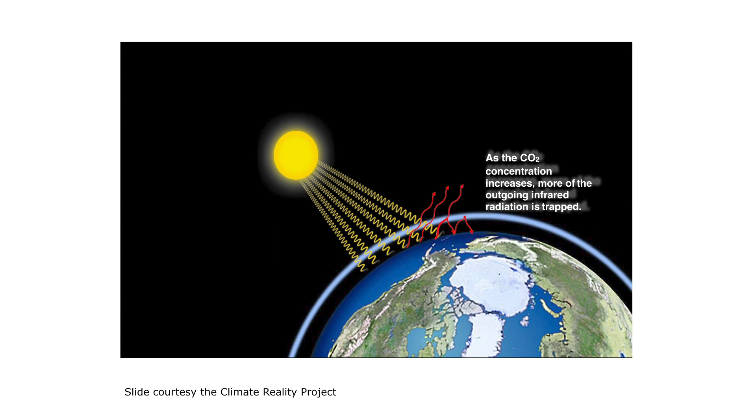I'm just going to show you some really scary math to start with. We all know that we have to reduce greenhouse gas emissions by about 90% in the next 30 years. And just to put this in perspective, that is to keep ourselves below 1.5 degrees of warming. That's a

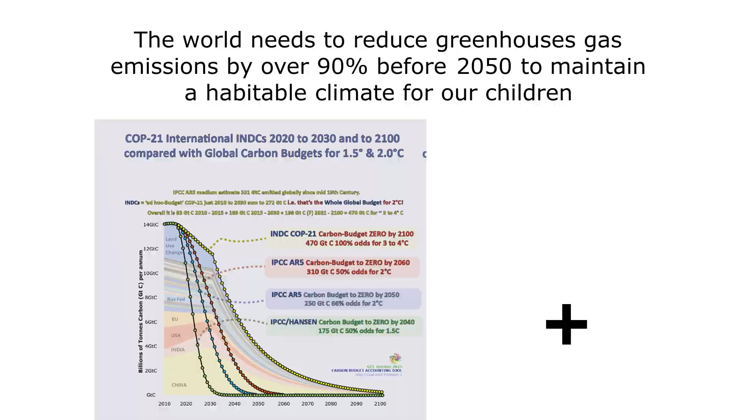really crazy target. I'm on the City of Edmonton Energy Transition Advisory Committee, and Edmonton will have blown through its carbon budget to stay within 1.5 degrees at the rate we're going in 8 years. If we implement the conservation measures that we have been planning, we can stretch that out to 10. So it's a pretty scary prospect.

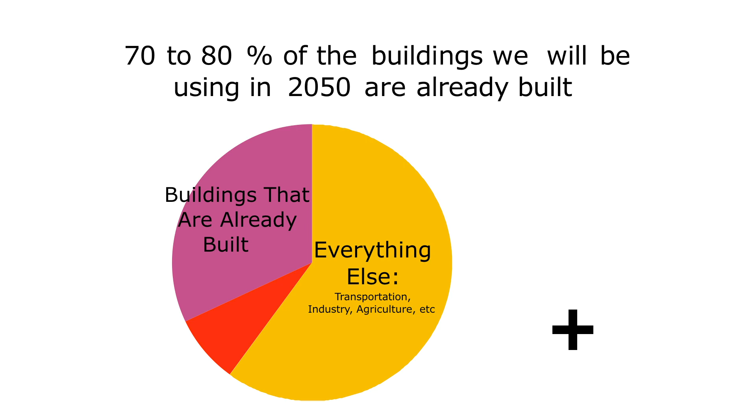So buildings are responsible for about 40% of those greenhouse gas emissions. Today, 70 to 80% of the buildings that we'll be using in 2050 are already built. That's totally scary. That means if we don't deal with existing buildings, we're pretty much hooped. We are not passing a livable planet on to our kids, and we haven't even started to do this. So it's a grim and really unavoidable fact at this point.

So the Dutch have got a little bit of good news. The Dutch have been thinking about this for longer than we have, and they've developed a pretty cool system. They start with existing buildings. They do a digital scan of it. They build panels in a factory off-site. They're on site for a few weeks, and they've turned these buildings into essentially net zero energy buildings. Zero on the meter, they call it.

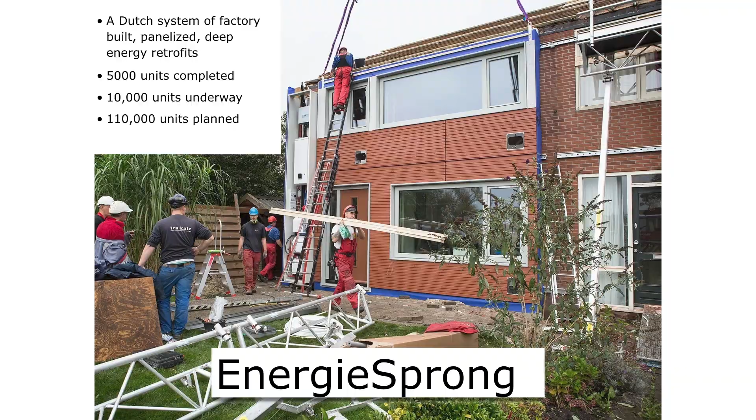The roof panels that come in have racking for solar panels. When they're gone, the companies that are doing this leave with a guarantee that the utility bills for that building will be zero, basically for the foreseeable future. And so they've done about 5,000 units, and they've got another 10,000 underway. Their pilot project is 110,000 units, and then they're planning on millions. So it's really inspiring and hopeful.

There are huge advantages of these panelized deep energy retrofits, especially doing it all at once. It's cheaper in the long run than doing a little bit at a time type renovations. Quite often, if you replace your siding and add 1.5 inches of insulation and don't make the building airtight, don't change your windows at the same time, and really you should have added 3, you're doing work that would need to be redone to get that building to a carbon neutral ready standard at some point. So it really makes sense to do this all in one shot.

It's way less disruptive on the site. You don't have tradesmen coming up 1,000,000 times doing little bits of stuff here and there. You have one big disruption and you're done. And it's cheaper in the long run. So we have gotten funding from Natural Resources Canada to do this to a 59-unit townhouse complex. They're paying part of the cost, and the co-op whose housing it is are paying the rest.

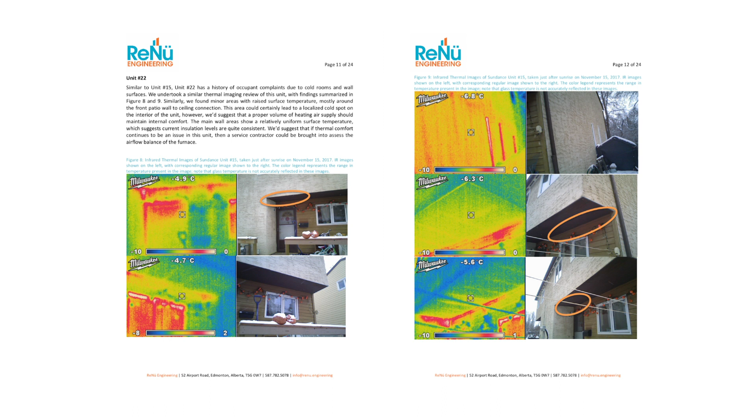And so they hired Stuart, who you just heard from ReNü Engineering, to formalize and professionalize the work that the students had done. And I helped him with the building condition assessment, and he did similar modeling and came up with scenarios that would come to a sort of carbon neutral ready. And he got Dave Butterwick, who is one of the partners in Butterwick Construction, and now Stuart and my partner in Butterwick Projects, to do the costing on it.

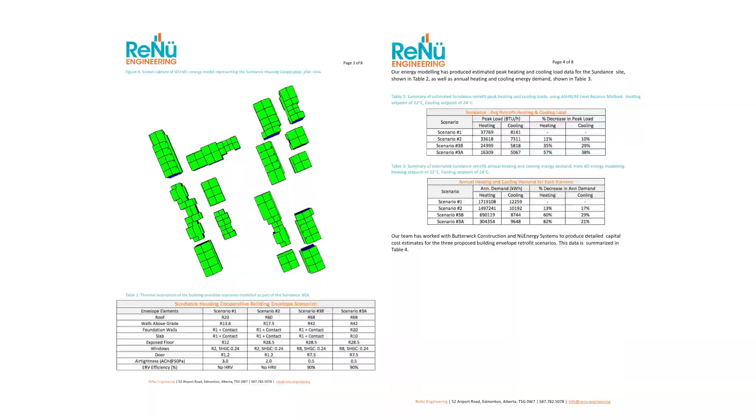And then not much happened with that until we got this opportunity for the R&D funding with NRCan, and we gave NRCan this proposal, and we're really taking the Energiesprong approach and applying it to a fairly difficult site where we're going to have to solve all kinds of problems that they don't really have in most of the multifamily sites in Holland.

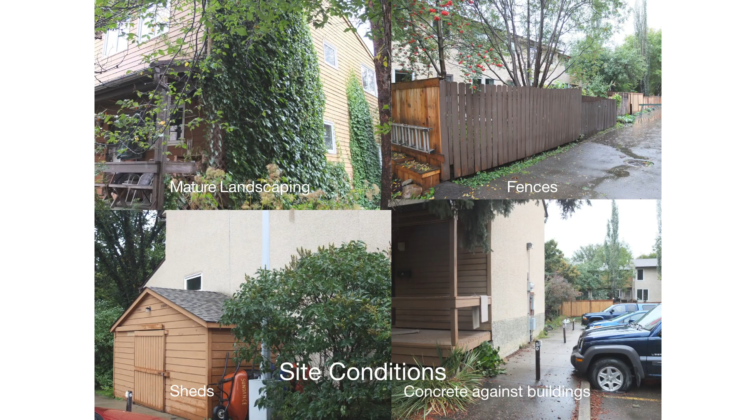We've got all kinds of landscaping. We have to watch out for... we're doing this while people are living there, and some of the yards are very nicely done, and somebody's grandmother's petunias are in the way of our panels, and these are all serious matters. We've got fences, we've got sheds in the way, we've got places where concrete is right up against the building, we've got some really tight geometry in some places, cantilevers.

And in fact, when I showed the little jog thing to a fellow who gave me a tour in Holland of a couple of Energiesprong installations, he said, "Oh, that would be a no-go." So we've got a real challenge here.

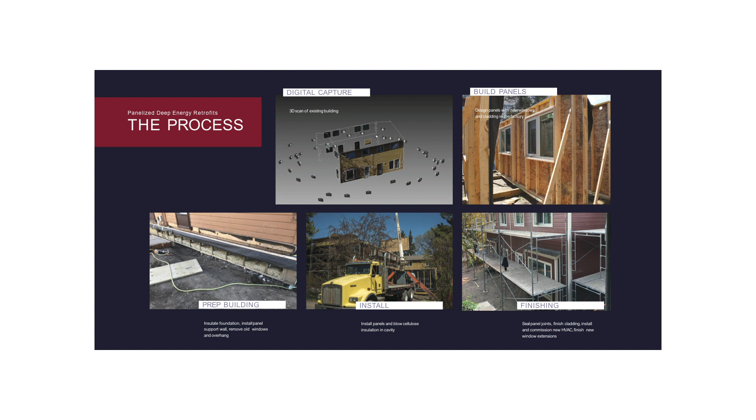So basically, our proposal to NRCan was that we would start with a pilot phase where we retrofitted the first duplex and develop systems and analyze the mistakes and the learnings from that, and use that to refine the costing before we tackle the other 57 units. So we've done that now, and we're in the phase right now where we're working on our costing on the other 57 units, and mulling over the lessons we've learned and costing out the changes that we're proposing to make.

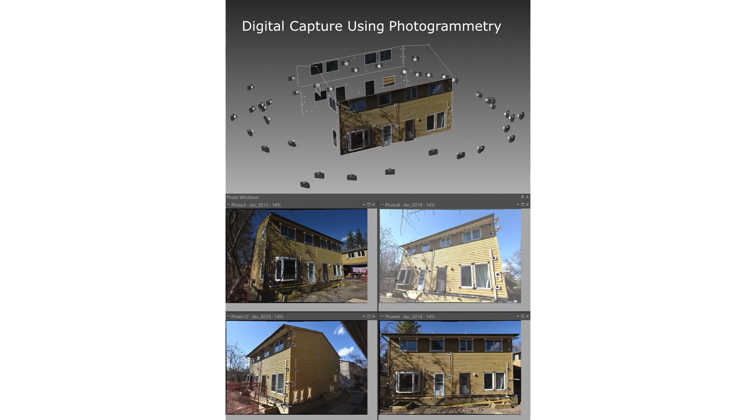So in a nutshell, the process is that, and we didn't do this in the pilot, we actually used a tape measure and measured the building because we're struggling with the digital capture still, but you use a digital capture that turns into panel drawings, build the panels, prepare the building, swing them in place, and then finish it off. And I think I talked about some of these advantages here. I just kind of like this cool banner that we had made, so I'll skip over that so I don't run out of time. But the digital capture is quite interesting, and it's a critical component of the process.

You can't really rely on tape measurements because of the likelihood of error. If you've got a crew of 5 or 6 people and a crane and panels that have siding on them, and you run into a window that's 2 inches off, or you forgot about a vent that you need, something doesn't fit, you're stopped in your tracks, and any of the advantages of panelization kind of go out the window.

So we're still working on this. We're working with photogrammetry, and we're also trying LiDAR, and we're making headway on both of those. That's part of what we're doing right now in the interim. We've got to get that going, essentially before the fall.

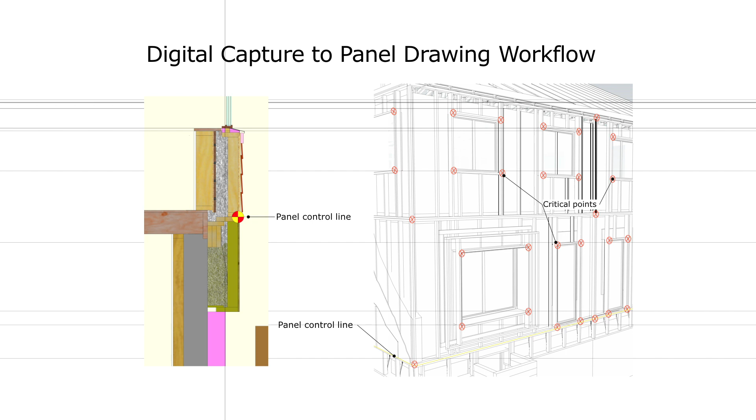And then once you have the digital image of the building, it's typically a point cloud. You need to then take dimensions off that point cloud that can turn into a reasonably accurate measurement of the existing building, not necessarily level, square, or plumb. The windows didn't necessarily get put where the plan was exactly. So you need to really have a very precise workflow that takes the digital capture into a CAD drawing for the panels.

So in this case, we actually built the panels on site using tape measurements, and learned that we can't ever do this again. We didn't have enough room to work, and we made a mess of the site. We spent all kinds of money restoring the landscaping. But it actually worked, and the details on the panels actually worked fairly well as well.

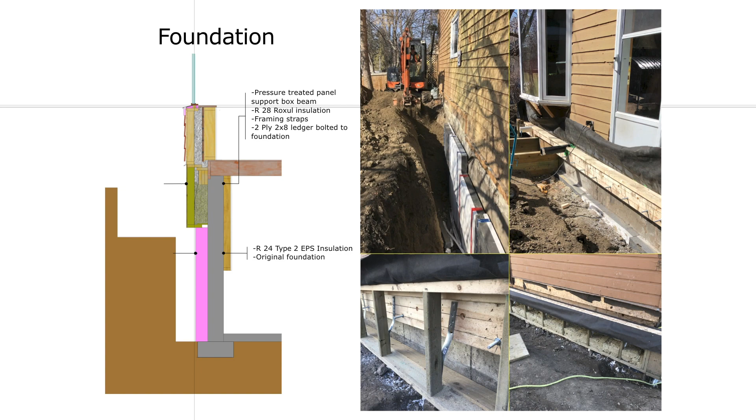So we're building a second 2x4 wall that sits on a support beam that we attach to the building, and then we blow that cavity. It's about 8 inches full of cellulose, and we use an exterior vapor open airtight membrane that gets sealed together behind the siding, essentially.

So at the foundation, and this is one of the sad lessons that we learned, we dug down to the footing with a backhoe just as the frost was coming out of the ground, and really made a mess.

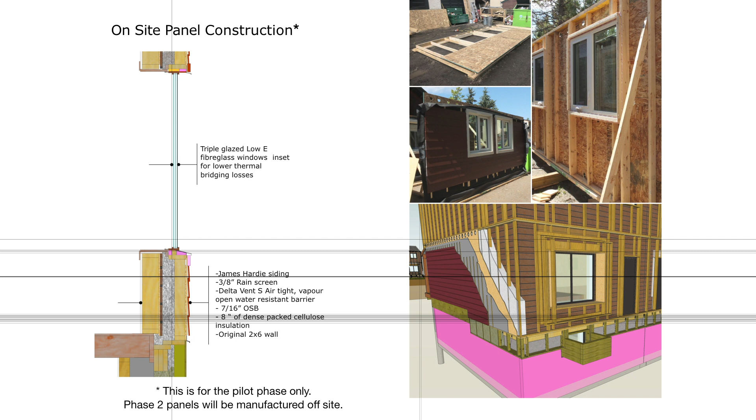We had more dirt than you can imagine piled in somebody's yard, and then some. And so we're now pricing the option of using a hydrovac truck to suck a trench of about 8 inches, and then we can drop a 5-inch panel of carbon impregnated or graphite impregnated EPS insulation. We're pretty confident that ultimately that will be a less expensive version,

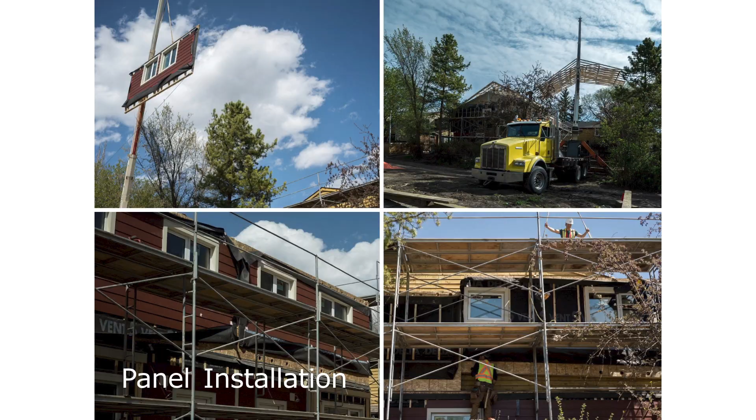and that's one of the things that we're working through at the moment. So then we had a big exciting day when we swung the panels in place; we've actually got some nice video of this as well. We did this in 2 lifts. We did the lower level, then filled that with cellulose, and then did the second level after that. And we didn't have any room for the panels, so we ended up having to actually do that lower level first because we had no place to build any more panels by then. Then we did the second panels.

In the lower panels we didn't put siding on, but we knew we had to try it with the siding on. And as I say, all this stuff is working. I think the details are relatively sound. We just need to figure out how to do it way faster and more efficiently. And we have a list of, no kidding, 200 things that we can potentially improve, do differently, that we need to work through to make this go a lot faster and a lot cheaper. And I'll talk about costs a little bit in a bit.

But that's our basic section. We've added the insulated wall with the windows installed, the doors, and some siding. Then blew the cavity full from above, and then zipped it together. And for the roof, we essentially cut off the overhang on the existing roof, and then built an entirely new roof over top. We've sealed the top with just a simple poly vapor barrier.

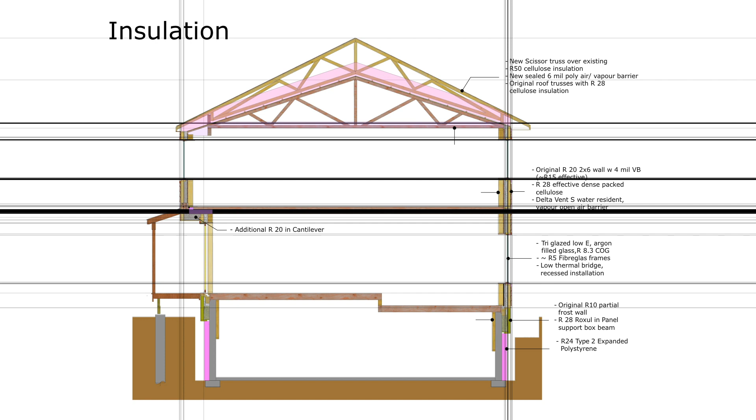Stuart did lots of calculations to see that would be safe, because we've got kind of a double vapor barrier. We've got the original vapor barrier in the ceiling, and then we've got a new vapor barrier over the old shingles. And one of the points to all this is to do as little to the existing building as possible. You don't want to rip off the siding. You don't want to rip off the shingles. You want to really spare yourself those expenses in labor and disposal.

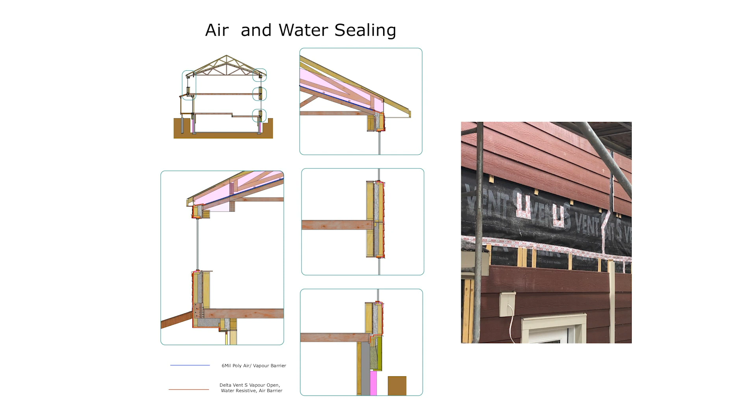And so once the panels are on, we knit the air barrier together, sealing it with very robust tape. You can see those little U's, those are sealing holes that we left to make sure that we could get cellulose under the windows. And basically in the basement we're sealed to the foundation. We haven't air tested this yet. We air tested before we started. These are very leaky buildings, 6 air changes an hour and 7 air changes an hour. So we're aiming to reduce that to about 1/10 of that.

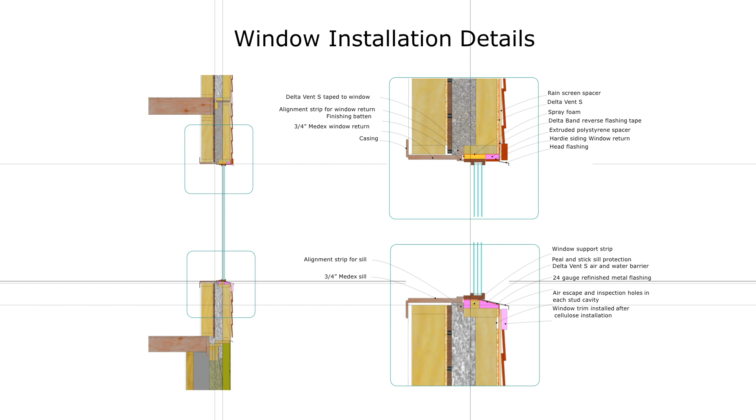And the windows have been set back into the wall, sort of passive house style, to try and reduce the thermal bridging, and also to keep the glass warmer so that we minimize the risk of condensation, because the window well is so deep. And because we've sealed the houses up, we have to install HRVs in all of the units. The plan mechanically is to replace the furnaces as well, but that's turning out to be a challenge that we're also working on right now.

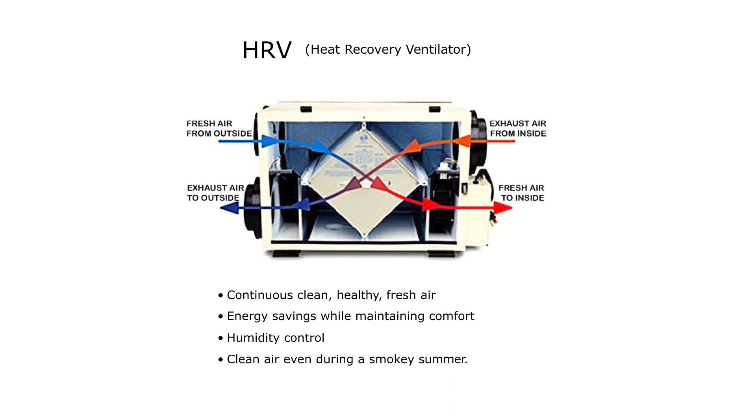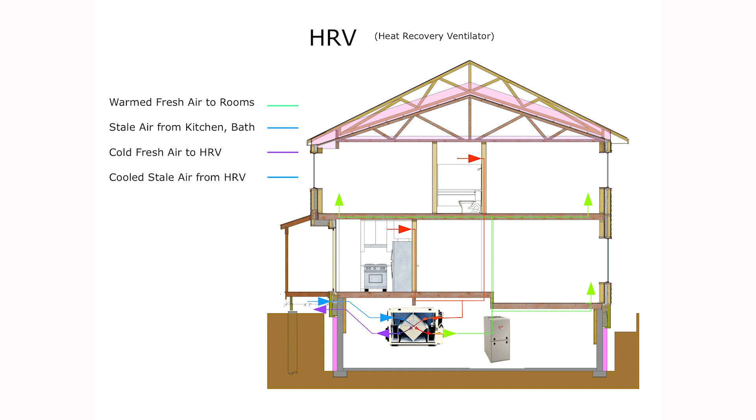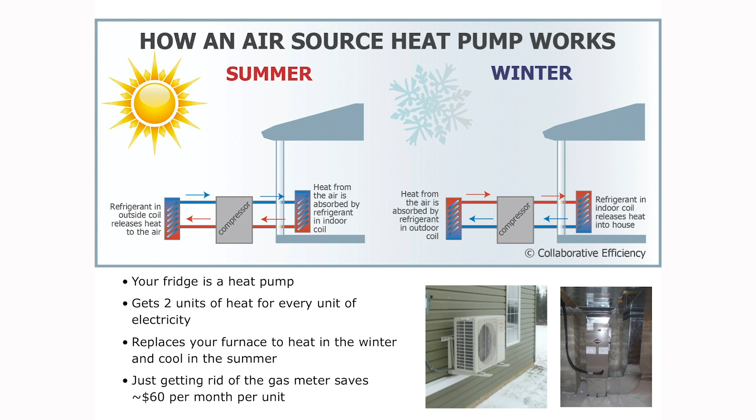I just got my 5-minute sign flashed at me here.

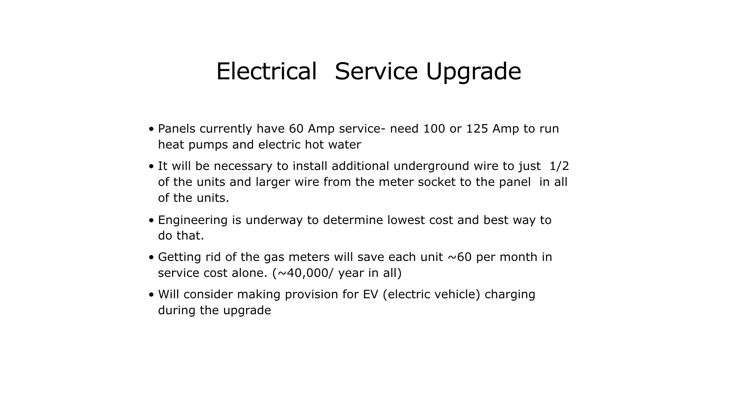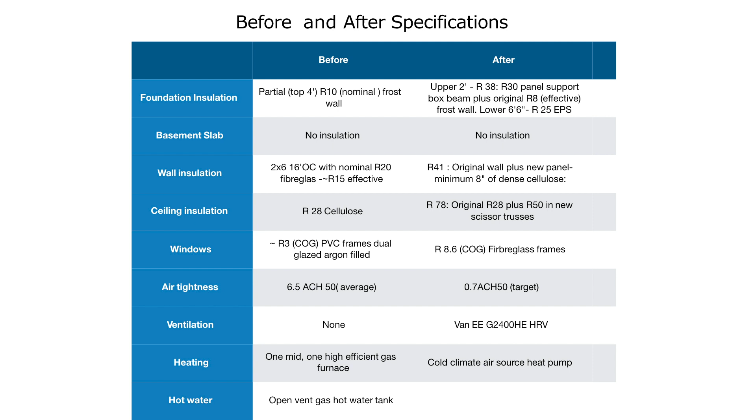So there's a whole new kind of beast, these panelized deep energy retrofits. It's not new construction, and it's not a typical renovation. In a typical renovation, you kind of work to what's there. You measure the building, and you kind of do it one piece at a time. We've got to be kind of cabinet precise almost.

And it's not even like building a new building from a set of plans where, if you put that window 2 inches away from where it's supposed to be, well, chances are nobody will notice. And here, it's got to fit. The tolerances, especially on the doors, are really pretty tight. We can only buy standard size doors. And as I mentioned, screw that up, and all the advantages are out the window. And so we have to do it really economically.

So the cost for our pilot, which is a duplex, is about $120,000 a unit. For us to go through with the other 57 units, we've got to get that cost down to about 85. And so we get a geometry advantage because we've got only one party wall in that duplex, where the other buildings are much bigger, and there's lots more party walls and less outside wall. That'll get us about 1/3 of that reduction. The rest we've got to get on bulk buying and economies of scale and efficiencies for my 200 item list.